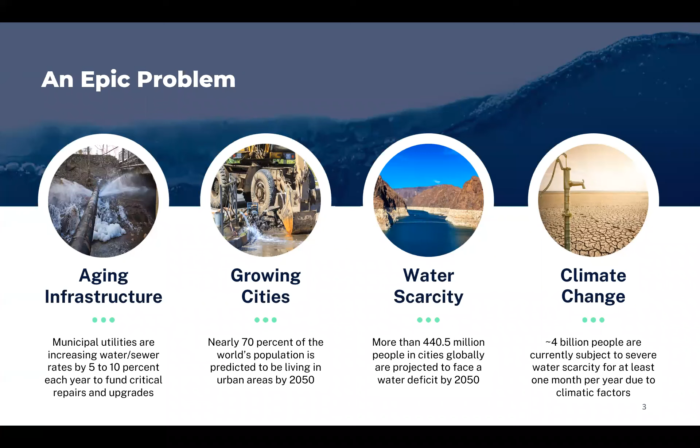It's no longer drought. This is the new normal that we need to be prepared for. And that's where we come in, really helping buildings adapt to that new normal in terms of being more thoughtful with water use. So there's three main pillars within the owner space in terms of why they might be doing this, outside of the big macro trends.

One, it's financially feasible to do so. Obviously, we understand that many projects are very pro forma driven. They have to get their financing tied together and things have to pencil out. And so we're fortunate that in many urban areas, we can hit that 3 to 10 year ROI. We'll talk more about strategies to do that here later in the presentation.

Obviously, there's sustainability. There's up to 24 LEED points, and I'll walk you through that scorecard that we can help capture. There's the newest, latest and greatest sustainability certifications, Living Building Challenge. I mean, gosh, you can't have a more exciting project from a technical engineer's perspective.

But then regulations - we're seeing a lot of cities now adopting ordinances that are mandating these types of systems. An example of that, we're based in San Francisco, where all buildings over 100,000 square feet, all new construction over 100,000 square feet, have to implement black water if it's a commercial building, or gray water or black water if it's a residential high rise.

So there's ordinances like that in Austin, LA, and a growing number of cities around the country, as different managers of the water supply portfolio are looking at this kind of myriad approach to managing water, right? They don't want to invest all the eggs in one basket of one big municipal system. They want to have that distributed approach that brings more climate resilience to the table for the broader community.

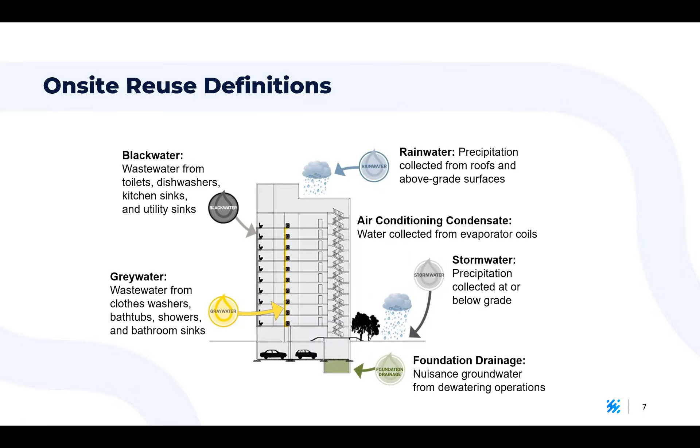Traditionally, we've thought of things in a very linear way. When it comes to water use, we've designed buildings with this once-through model where we use the water and then waste it, naming that water appropriately, wastewater. Fortunately, that model is being disrupted thanks to the work of many of our colleagues.

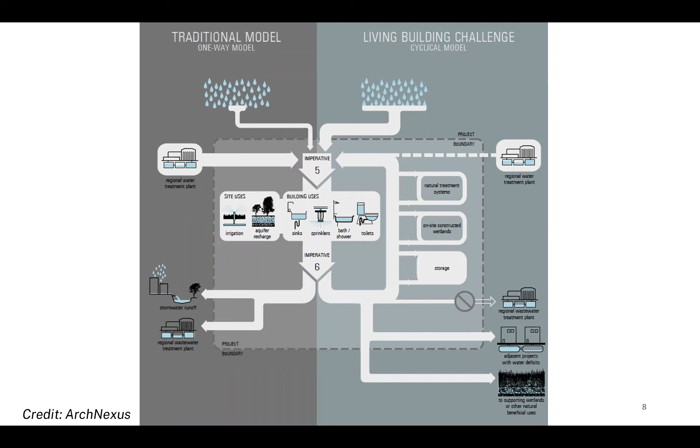I'll cite here the International Living Future Institute. They put together the Living Building Challenge, which is now making us think more closely about that waste stream. What can we be doing with that? How can we do this better? What we're seeing now is more circular, regenerative approaches to our water systems, and we'll dive into that.

From a North Star perspective, what does good look like? What does the best-in-class building look like? Well, certainly it'd be hard to argue with doing any better than net zero water. Yes, you might be able to do net positive, but let's assume net zero, which means we're minimizing total water consumption.

We're maximizing the use of all these alternative water sources: black water, gray water, dark gray water, storm, rain, and foundation drainage. And then we're finding ways to take that wastewater and create value with it, reusing that water where we can, and returning it to its original source. In many projects, that may be the groundwater, so we can safely infiltrate that water back to where it came from, where it will then be used again further down the road. And of course, maximizing green infrastructure throughout the project.

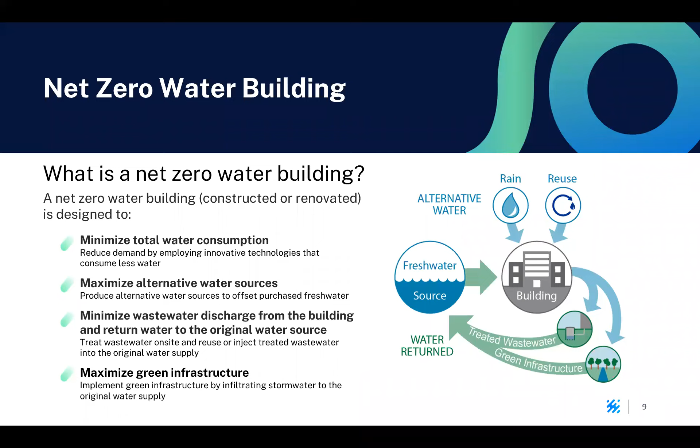A little bit more under the hood, in terms of what that looks like in practice: frankly, when you hear net zero water, you really have to think most closely about the potable water supply. The non-potable needs, I'm confident you can meet in most cases, but it's the potable water that's the issue, because we are not yet in a place where you can take black water or gray water, treat it, and make that part of your drinking water supply.

Net zero water is going to look very different from region to region, whether it's even feasible. I'm coming to you from California. Take Southern California, for example: net zero water would be very challenging, just because we don't have the type of rainwater supplies that you might see in Northern California. Northern California falls somewhere in the middle; there's a good amount of rain in most years, not all years, but the challenge there...

I worked on net zero non-potable water for Microsoft at their Silicon Valley campus. The challenge there is you need to capture as much rainwater as you can in those few wet weather months, and then try to store it so you can use it through the dry months. What results is a tremendous amount of water storage, typically in buried tanks located below the landscape system, but that does come with a cost.

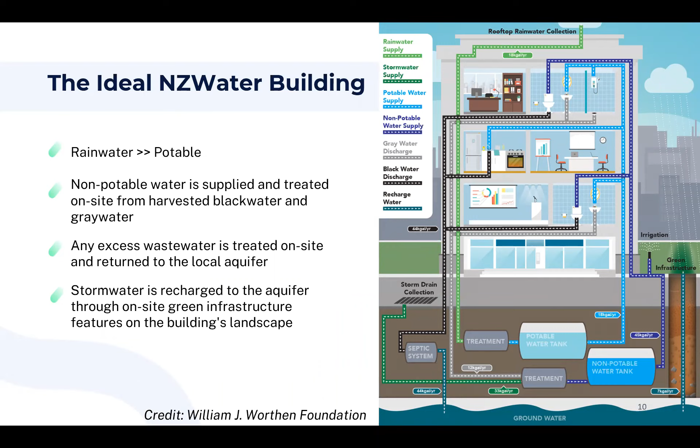So we've given you that high level view in terms of the building scale, city scale, and we're going to continue to distill that down to the valves and pumps, I promise. Now we'll get to the in-building systems side.

There are a number of ways you can treat the water. Again, you can do gray or black water. Those tend to look like very similar process systems. The reason for that is that recycled water must hit a certain water quality requirement for biological oxygen demand, or BOD. To achieve low levels of BOD, you need some form of biological treatment.

Otherwise, if you were just to try to filter it, while you may be able to filter it for some time without reducing the BOD, that would put your final water quality at risk. Also, from a process efficiency standpoint, that puts more strain on other, much more costly components, being your membranes. We'll talk more about what a membrane is and where it fits in, but essentially you're deferring that cost to now an operating cost, replacing things much more frequently, which adds up very quickly.

So our approach with these technologies is, again, from this one water principle: yes, we can reclaim the water, but then what other value can we provide back to these projects? Frankly, there's a lot of organics in our blackwater, for example. So our approach is to strain all those organics out, dewater them, and put it through a rapid composting process that yields high quality soil amendments that can be repurposed in the local landscape and local ag districts.

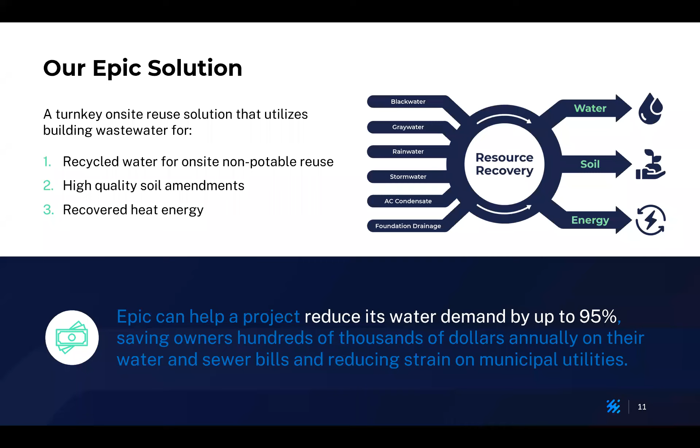In terms of big picture numbers, with technology like this we can reduce water use by 50 to 95%, 50% being for a residential project, because only so much of the wastewater can be reused due to the potable requirement. For commercial buildings, you can reduce your water use by 90 to 95%, in a very easy manner. You can go full 100%, but that's going to require a few extra layers of technology, so that's never where we'd start the conversation.

It really just depends on the local needs of the project. What's the existing condition with the sewer district? Do we have capacity? If you do, great—let's have a backup connection there and take the extra 10% to the city.

For us, we actually spun out of initial work with the Bill and Melinda Gates Foundation. Our co-founder has been practicing in the MEP space for 40 years here in San Francisco, so certainly that building-first philosophy has transcended everything we do.

We recognize that in doing on-site reuse, this is a new technology that requires space that wasn't otherwise allocated, it was otherwise allocated for bicycles or parking spaces. So we're very sensitive to how do we integrate this in the most strategic way possible to reduce that footprint, and how do we minimize energy demand?

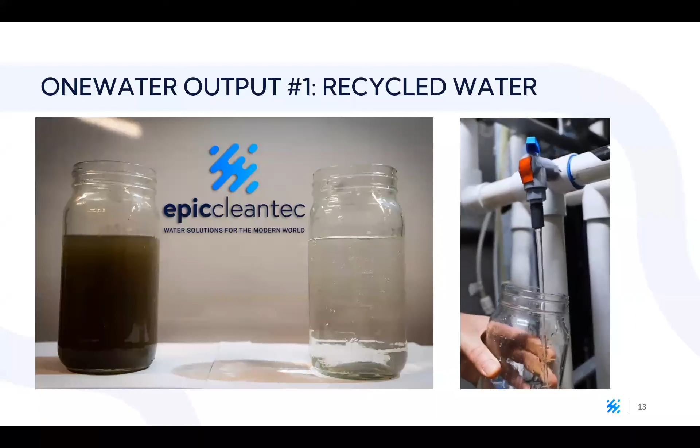Beyond just the skid, we need to think about tanks, because tanks take up a lot of space. Those tanks are needed for storage of the final treated water, and for storage of the incoming wastewater, which you're seeing a picture of here. We also need storage for an eye wash station to meet OSHA requirements, chemical containment, that kind of thing. So there are additional area needs that need to be addressed, and that's where it all comes down to the project - how do we get creative, how do we reduce space with good design thinking?

So I promised I'd talk a little bit about recovered heat. An interesting statistic I saw from the US Department of Energy, about a year and a half ago, estimated that 350 billion kilowatt hours of energy is lost to our sewer every year. 350 billion - big number, engineer, what does that mean? I did the calculations, and by my calculations, that's enough energy to power every electric vehicle ever made. Tremendous opportunity, and that's just in North America.

The fact of the matter is heating water takes a lot of energy. We heat it up, send it up to the building, we shower in it for 10 seconds - I don't know how long it's in the shower tray - and then it's right back down the drain. For us, it's kind of that aha moment of, well wait, we're already processing that water, let's take the heat out of it. That's a very simple technology, a heat exchanger.

We can use that heat energy to preheat the incoming domestic hot water system, heating the incoming potable water that's going to the domestic hot water system. In doing that, the typical figure we'll use is you can save around 24 kilowatts per day per 1,000 gallons treated. So now we have to figure out how much flow is coming out of my building, and once you know that, you can get a rough sense of what the opportunity there is.

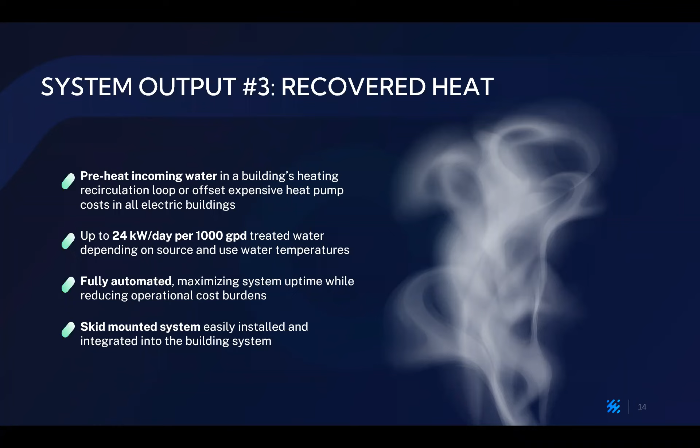Of course, for us on the technology side, it then comes down to integrating that sophisticated system with all the right controls, so those things work seamlessly together. Your wastewater system, we need to know there's water in the tank, we need to know when the right time is to run through that system. Correspondingly on the demand side, making sure everything's load balanced is really the key here.

And then there's the soil amendments. I'm realizing my slide numbering's off because I moved things around - I got really excited about energy today.

What you're seeing here, not in real time, is an animation of our solids processing hub. What you're seeing in that picture is that very carbon-rich soil amendment that can be reused in the landscape system, which is a really great way to close the loop. Otherwise, the conventional approach is to jam all this material down the sewer and let somebody else deal with it, and what happens is the sewer utility now has to spend a lot of money conveying it.

It's going to present them some O&M challenges in terms of all the debris that stops their pumps and lift stations, and then they're going to burn a lot of energy. The way we're managing that is to actually screen it out mechanically, and by doing so we reduce the energy needs on our system because we've taken all that organic matter out mechanically, as opposed to using blowers and other energy systems to break it down. So it has a really big effect in terms of reducing our system's energy use and the footprint of the technology and overall design solution.

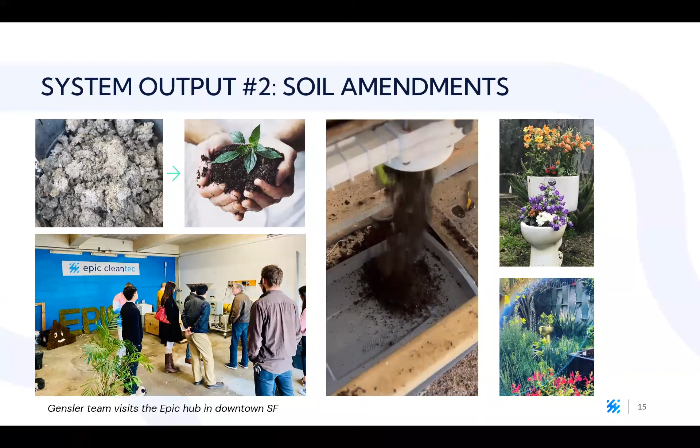And then of course you get a nice closed loop system created in terms of that soil amendment that can be reused in so many ways. You can partner with your local parks department as another amendment that they can mix in with their compost system, for example. So there's a lot that can be done here. Frankly, this isn't a conversation about soil health, but it's a really big challenge we face at a societal level, especially in a lot of the ag areas. It's about protecting our topsoil, so this is a nice way to return that back to where we need it most in a way that brings a lot of benefit to the project as well.

This is something new for us. Essentially we have a very sophisticated control system running all of our pumps, our sensors. We need to make sure we're monitoring water quality in real time, and we need to make sure that if we are outside of any preset parameters, we shut the system down. It's all about public health.

In doing so... what happened there? It's going to skip on me again. Anyway, I'll just skip ahead so it doesn't happen again. In doing so, we have the ability to monitor flows at a broader level throughout the building.

The opportunity we see is that, look, there's a principle: if you don't measure it, it's very difficult to improve. So now we can integrate data from other uses around the building to capture real-time water use and then trend it. That's the key piece—we can see the trending on our landscape systems, on our cooling towers, on our potable supply, see how water is being used, and use that data to hopefully inform operational improvements. We can see from month to month, hey, something's out of alignment, and we can flag that through our monitoring capabilities. We have an algorithm that monitors that and can tell the building, hey, you've exceeded your average—what's going on? You might want to check your irrigation system.

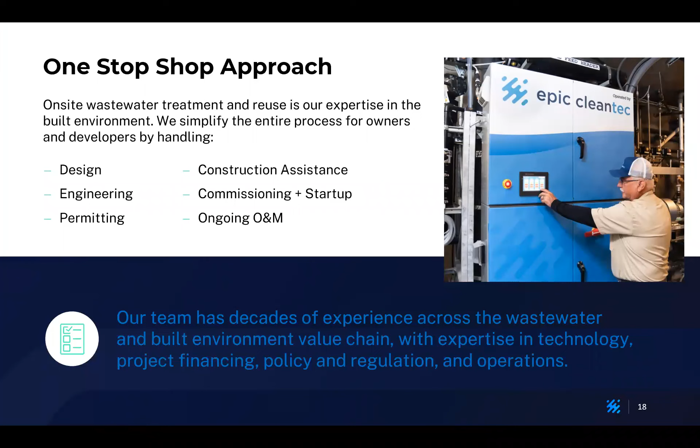As with all these projects, there's a lot of technical details and regulations. I'm not going to talk too much about that—that's where we can help advise on it: what are the regulations, what should be the permitting pathway, how does this whole design integration work. We're going to get a little sample of that today.

I'm going to take a quick second to talk wastewater, and I apologize in advance if I put anybody to sleep. I will try to keep it to less than four minutes, and then we'll get into MEP integration.

I am sorry, but my slides are automatically advancing and I don't know why. If I can freeze this.

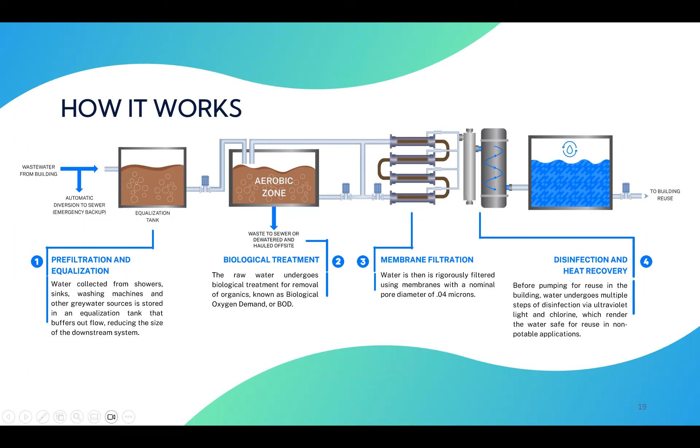So there is a lot that goes into the building integration side. It touches on plumbing, it touches on electrical, obviously, it touches on HVAC—HVAC in the sense of like, how is this room ventilated, right?

We're always going to come to the table with a practical but slightly conservative approach, and provide options. The conservative approach here from an HVAC standpoint is considering the potential for odors. While we would never expect that under normal conditions, you have to kind of plan for the worst.

So then we start to look at the HVAC system. How is this system, how is this room, how are these tanks tied into the rest of the HVAC ducting? Do we have a direct exhaust from the room, which is oftentimes preferred? That way there's no chance of odors backing up into the HVAC system and ending up in the lobby, which hasn't been our project, but I've heard of that happening.

Additionally, if you want to be more conservative, we can put in place odor scrubbers to ensure we're pulling all of that—what we call foul air—out of the EQ tank. Let's be honest, it has an odor to it, but we can manage it actively as opposed to more passive systems. So we get involved in all these different arenas.

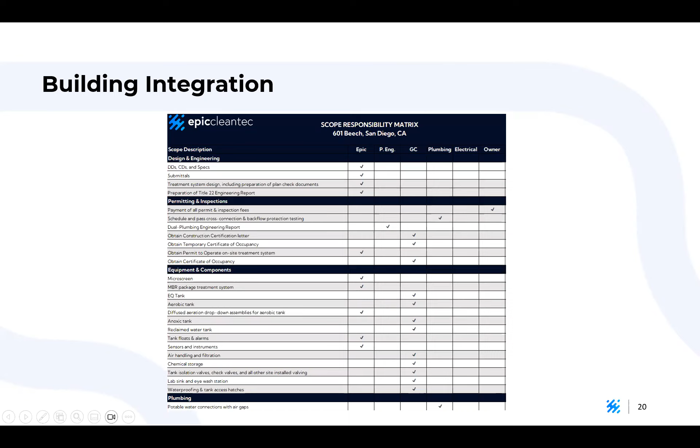It starts with design and permitting. What I'm showing you is what we like to put together at the start of a project: a responsibility matrix that details out who's on first—who's doing the design work, the installation, coordinating scopes between us, the architect, the plumbing engineer, the contractor, the owner, the GC, et cetera. There's a lot of people involved, and our goal is to streamline everything.

From a permitting perspective, there's the design, doing things in Revit—if you want to BIM it out, sure, we can help with that too. There's the submittals. But really, when it comes to wastewater, there's what is called an engineering report. In California, it's called a Title 22 engineering report. Title 22 are the state regs for water reclamation.

So a report needs to be prepared, it needs to be stamped, it needs to show to the regulators, basically, proof of how we're making this project safe.

And it comes in the form of what they call log removal targets. For each type of disinfection technology, you'll get a certain amount of credits for removal of virus, protozoa, or bacteria. Depending on your specific configuration of disinfection, there's a crediting framework. So you need to show them: here's the systems we're using, here's the dose of UV we're providing to meet the minimum threshold, or oftentimes exceed the minimum threshold by regulation.

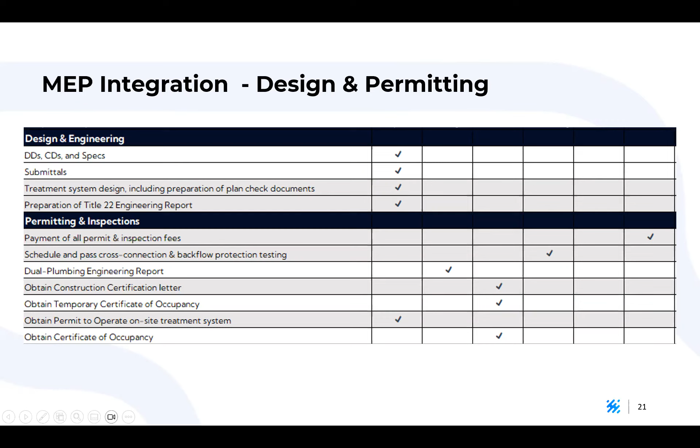Let's collect comments. Getting those comments earlier is also helpful so we avoid redesign later in the project. Fortunately our team's been through it quite a bit, so we kind of know where the landmines are. We know specific design strategies that help avoid the known concerns of the Regional Water Quality Control Board and Division of Drinking Water. Those two work together collaboratively to make sure these systems are safe for buildings, and they do a really great job doing that.

On the plumbing side, we'll get into the nuts and bolts. There needs to be a potable makeup to fill the treated water storage tank in the event the system's down. There's never a plan for downtime. The system might go down intermittently for cleaning, but frankly that's addressed via the buffering tanks. But in the event of the unforeseen, you need a potable backup to ensure we have water for those connected fixtures.

Now the big concern from a permitting perspective is backflow. The regulators want to make sure there's no way this recycled water supply can backflow into our potable pipes, both in the building and out in the street. So by regulation, when you're refilling that tank, you need an air gap, essentially. It's a gravity supply, you shoot water down into the tank. There's no way to back-supply that because it's not connected to a pressurized source.

So we can help with that. The makeup valve obviously needs to be controlled. We need to know when the tank hits a low level, so we need some fill from the city supply. There's diversion of the wastewater we talked about on the incoming wastewater side, which is another component that needs to be thought of and integrated into the site. There's the booster pump system that pressurizes the treated water back up into the building. You have your backflow preventer, required by code to protect the municipal side of things. And then you just have the interconnecting piping between skids.

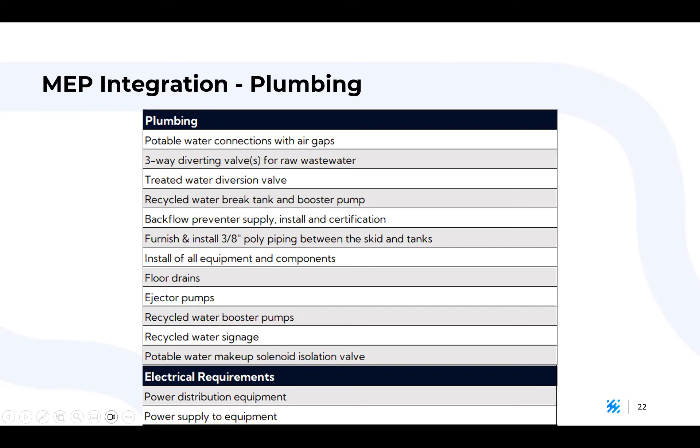So one of the other things to think about is phase development. We see a lot of that, big master plan developments, work that happens over, frankly, over a decade. And one of the concerns we hear from owners is, well, how does this system adapt to my development plan? How does it scale with my business?

Fortunately, there's a really elegant way to deal with this. Our systems are all modular. We do put them in shipping containers from time to time. It can be on skids. For this example, it's in a shipping container, but essentially what you can do is with each successive phase of the project, you bring in that next array of treatment capacity.

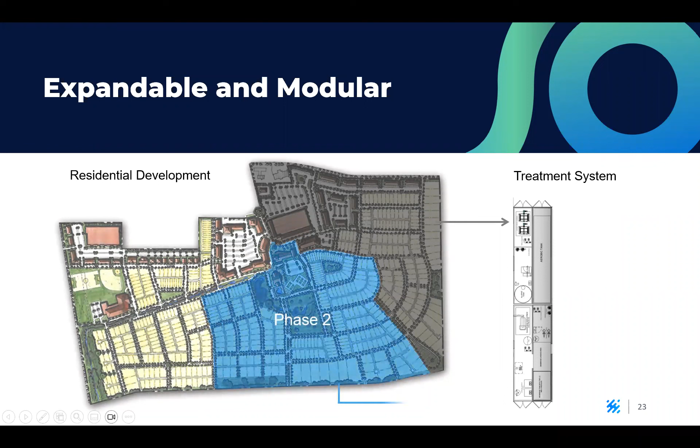There's some strategy here in terms of looking at the development phasing, the timing, understanding from the owner what their tolerance is for risk. And by risk, I mean ultimately the lowest life cycle cost and all-in first cost is to upsize some components to serve all 3 phases of the development. So in an environment where you're definitely going to build these next 3 phases over 3 years, we say, no questions asked, let's upsize the initial screen device for all 3 phases.

On the other hand, you might have a developer that says, well, this is a 20-year master plan, and I just can't get my head wrapped around investing any money into phase 3. Okay, there's a plan for that too. We can basically put in place now parallel arrays that'll each work independently as new capacity comes online.

So there's a million different ways to do this. It affects your screening, which is one of the key areas to look at, your initial treatment step being the screen. It affects your tanks. Oftentimes it's more economical to build 1 larger tank than 3 small tanks. It's more space efficient to do that as well. So do we operate 1 tank at a lower level in phase 1 and then just create freeboard with each successive phase? Or do you want 3 tanks? That's just going to depend on the project.

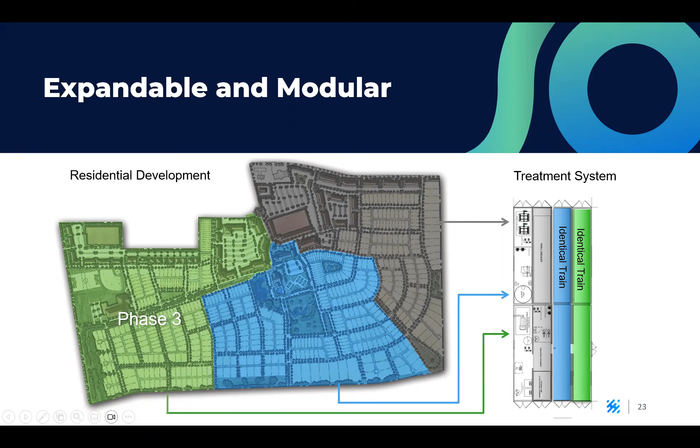So in terms of where all this work is happening, I think we kind of talked about it, but schematic design is usually a great starting point for most projects in terms of just starting to think strategically, evaluate options. This is where you're doing maybe a feasibility study. Let's look at the use types of the building, the program. In this phase, we might be doing a water balance, looking at the utility rates, penciling out the annual savings, putting together ROM costs for first costs, for operating costs, and basically doing a payback assessment. You may be doing initial layouts to answer the question, do we have space for this? But that's kind of the extent of it.

And then at this point, the system's a black box. Okay, we're going to put it in this room. We don't need any details about skids yet. But certainly in that early phase, it's very beneficial to start to get the requirements mapped out, start to get aligned on that responsibility matrix in terms of who does what.

Detailed design, as I mentioned, is usually where we start to do more of the regulatory outreach, really kind of elevating the design thinking around the system, starting to firm up in terms of footprints, proving to ourselves that yes, this absolutely will fit. In feasibility, we're working off the back of a napkin. In detailed design, we want to start having some firm calculations that support those initial assessments. And then obviously during CDs, that's where you're doing your construction documents, BIMing out the system, and things really start to come to life at that phase of the project.

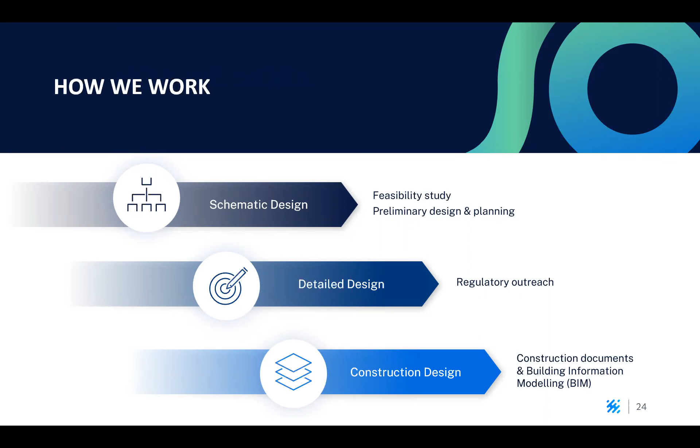Check, see how we're doing on time.

Regulatory drivers. So this is a big one because it just varies so much by state. It's hard not knowing exactly the representation here, from local jurisdictions to states. What I will say is that...

Essentially San Francisco is very much a leader in this space in terms of on-site water reuse. They chair the Blue Ribbon Commission, which includes something like 30 other agency members, city agencies that range from Austin to LA to places in Minnesota, Hawaii, Oregon, Washington. I can almost guarantee Colorado - all these states have delegates to this Blue Ribbon Commission that's chaired by SFPUC. SFPUC has already done the hard work of figuring out what are the regulations pertaining to these newer systems.

How are we going to permit this? What are the requirements? And basically what they are producing is a framework that can now be adopted by other agencies. So we kind of have a frontline view, being headquartered in San Francisco, to what is likely to transpire state by state. And undoubtedly it'll vary slightly, but the general sentiment I get from a lot of regulators is, hey, let's not reinvent the wheel. Let's follow that framework. It's established, it's working, and then we'll start to tweak it to our needs in time.

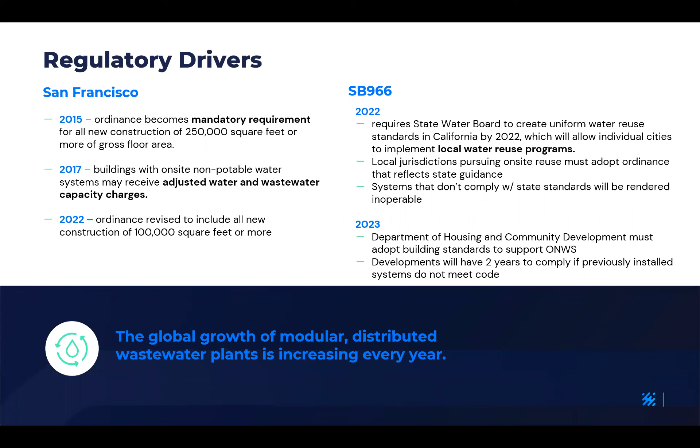Fortunately, especially in places like San Francisco, that came with grants and incentives. We'll talk more about that when we get to the pro forma. So here's the pro forma - good time to talk about that. Obviously, these are new costs to projects.

I'd say the hidden thing to many owners that's very eye-opening is the cost of conventional utilities. We pay a tremendous amount for water and sewer utilities for larger developments in urban areas. When you can reduce that by 90%, that's a big deal to them.

Additionally, there are ways to work on the first costs. There's grants, and I have a whole list of those I can provide as a follow-up. Feel free to contact us.

Connection fees is something I've always put on the table. Every project pays a fee to connect to the utility, a water and sewer capacity charge. We say, let's be practical here - this building is going to use 90% less, or 50% less if it's residential. Can we work together to prorate that?

Fortunately, we've gone to new cities where there's been no prescriptive pathway for this, as there is in San Francisco - San Francisco is very prescriptive about what those capacity fee savings would be. You go to the new city, show them the rules, the regs, the capacity fees, the data, the modeling, the technology - you bring all that together.

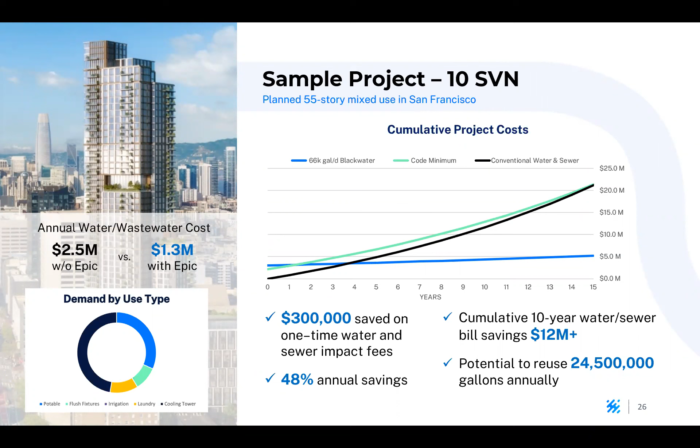But of course, this is hardly ever all about finances. There are a lot of important reasons to do this, one of which, of course, includes sustainability. So in terms of where we fit into that story in the LEED scorecard, our combined system - let's say it's a Blackwater system and we're doing all three resource recovery modules - you're looking at around 24 LEED points. That comes from the water conservation side, that comes from energy, that also comes from the solids recovery piece.

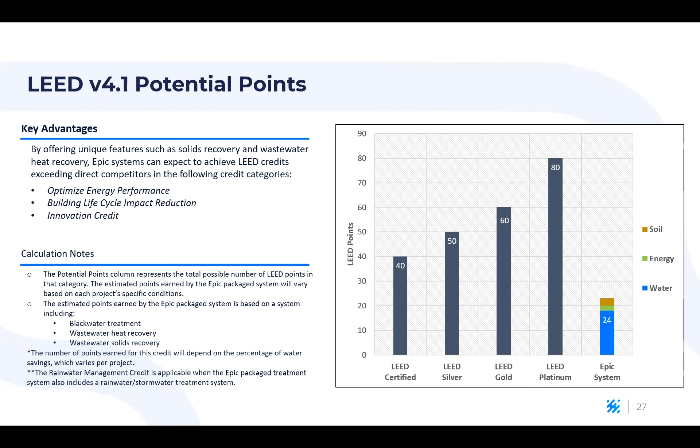To look at that in more detail, here's a kind of draft scorecard, in terms of where those points might come from. Obviously you have your outdoor water use reduction, indoor use reduction, optimizing your process water. If there's a cooling tower, rainwater management, let's bring that into the conversation and make sure we're optimizing that resource accordingly. The building life cycle impact reduction really focuses on that solids recovery piece.

And we're actually working now, because the conventional approach is to put it in the sewer and treat it somewhere else, because we're treating it for so much less energy, we're actually working to get greenhouse gas credits for that soil amendment. So basically putting that carbon right back in the ground where it belongs.

Optimizing energy performance, that covers the thermal energy piece. Energy metering, sure, let's add some sensors to this so we can claim that credit. It's designing with resilience - obviously that's the conversation that we're having here today. But when you start to piece all these things together, there's additional value beyond just the water conservation credits that many people kind of overlook. They think just water, but it's an integrated technology and story that we're trying to tell. And there's a lot we can do to claim points for your project.

So it's all project by project based, it's not to say that every project is going to get 24 points. It depends on the program, it depends on your utility rates. What makes sense? Does it make sense to do all 3 modules, or maybe just 1? So again, the points will fall somewhere in between.

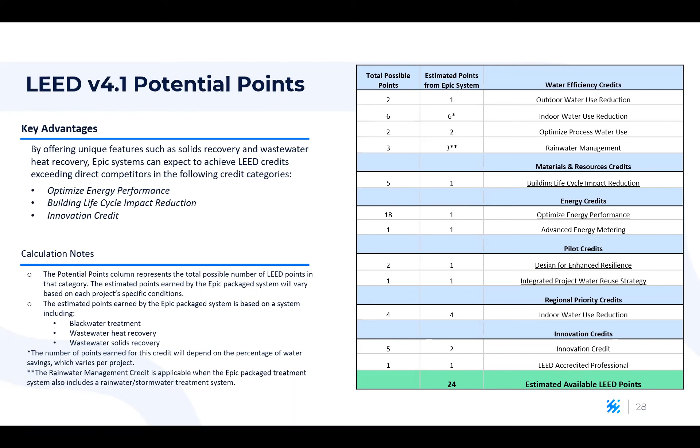As cities adopt programs, that oftentimes comes with grant funding opportunities. An example is Austin - I think they just finished their first year of their program. They still have a grant for optional projects. Projects will eventually become mandatory, at which time the grant conditions will be more challenging to meet, or potentially the grant goes away altogether. So it's a great time to start now.

And one of the interesting things I hear from a lot of owners - fortunately, we work with a lot of great people who are very future driven, thinking, I'm going to build this building.

It's going to be built to last, designed so it doesn't become quickly outdated. With the regulations and the traction in the market, buildings of the future are likely to include these technologies—I'll almost guarantee some form within every new building beyond a certain scale in most urban areas. So owners think, why would I build a system now without it? I don't want every building on the block to have these advanced water technologies while mine doesn't, or come back years later paying significantly higher rates due to climate conditions. So they see this as a way to design for adapting to trends while protecting from rising utility rates—water and energy are the two highest-rising utilities you'll see.

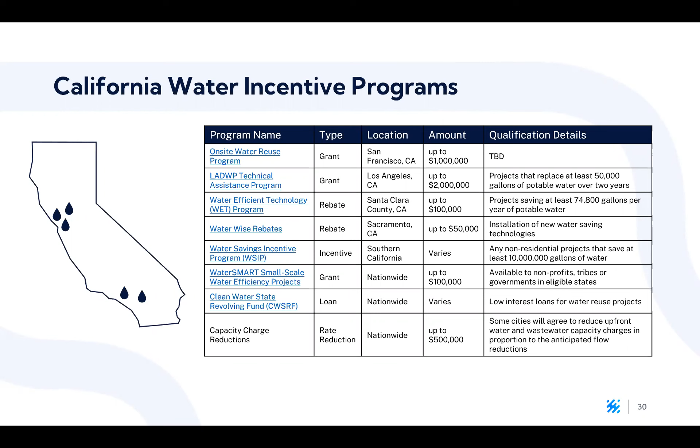So a lot of activity happening there. I mentioned the grants—I'll provide a link here with as many as I could fit into a table. This focuses a bit more on California, but there are a few national programs to look into, and others, so feel free to reach out and we'd be glad to connect you. Also, there are local businesses, especially in LA, that help connect owners with grant funds—that's their whole purpose, identifying funding opportunities to help drive conservation, whether through rebates, grants, or what have you.

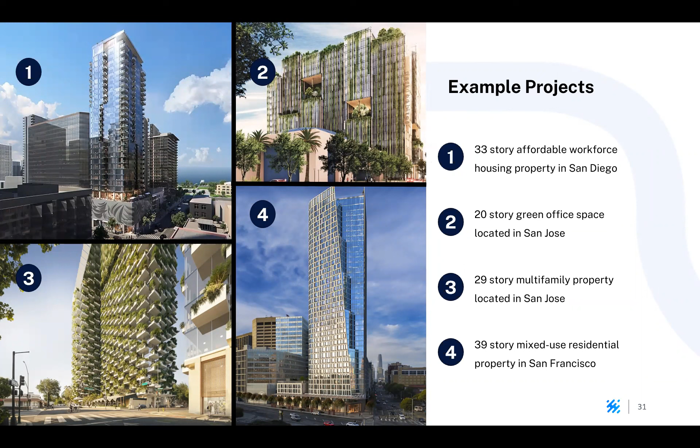This gives you a quick sense of some of the projects taking place, completed or in progress, here in California—there are many others but we kept it California-centric. I'd say one of the really important things we see as our role in this space is helping to change the conversation about our water systems and our connection to water.

We put a lot of time into conferences and speaking events—just for Greenbuild this year, we brewed a considerable amount of beer. In hindsight, probably too much beer, with gray water sourced from the first approved gray water system in San Francisco, at Related's 1550 Mission development. We were very fortunate to be part of it. We said, we're trying to have these conversations about why this is safe with regulators, clients, and design partners—what's a better way to show it's safe than to stand by the product and start drinking it? So we contracted a local brewery and brewed about 7,000 beers, which again, in hindsight, was probably too much. But we threw a great party and had a lot of fun with it.

It's been really informative to see—we sent beer to some people we work with, and I'll pick up on a Zoom call and see a four-pack sitting on the shelf, and they say, yeah, this has been amazing for us too. Because clients come to us and say, I see what you're talking about, but wow, this is a lot to digest—how do you know it's safe? And what better testament than standing behind your product in that way. So it's helping change the conversation, bring the opportunity and the safety aspect to light.